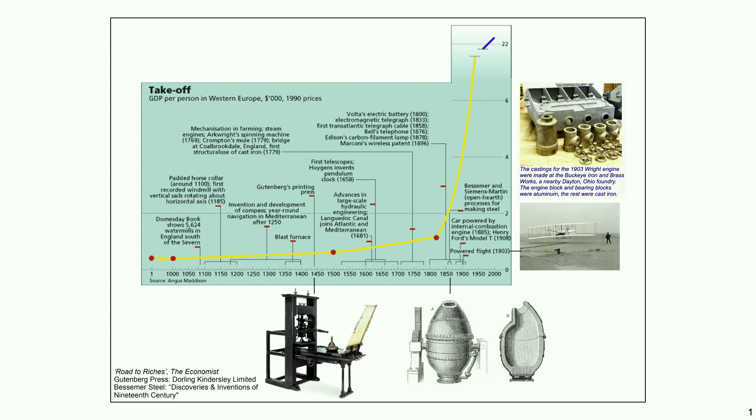This chart emphasizes how advances in manufacturing have changed the course of history. Maybe we're beyond the time where one invention can do that, but Gutenberg's printing press in the 1400s, printing of books using movable type, and the casting process that made that possible, spread information across Europe and around the world. Or the Siemens-Bessemer process for open hearth manufacturing of steel in the late 1800s, in the Industrial Revolution. And even the Wright brothers' airplane, not made in quantity, but the engine block was made of a lightweight aluminum alloy, and manufacturing helped enable the plane to take off.

Manufacturing is also really hard. Lego bricks are among my favorite things, and think for a moment about how you would describe how to manufacture a Lego brick. You may know that it's made by injection molding, a very widely used process where molten plastic is squeezed into a mold. When the plastic has cooled, has frozen, the mold opens up and the brick drops out.

I just described it to you at one level, but now think about how you would explain how to make the surface so smooth, the dimensions so accurate, and the bricks so consistent that they will all fit together no matter what size and shape. And now imagine how one would describe the manufacturing of something as sophisticated as an iPhone.

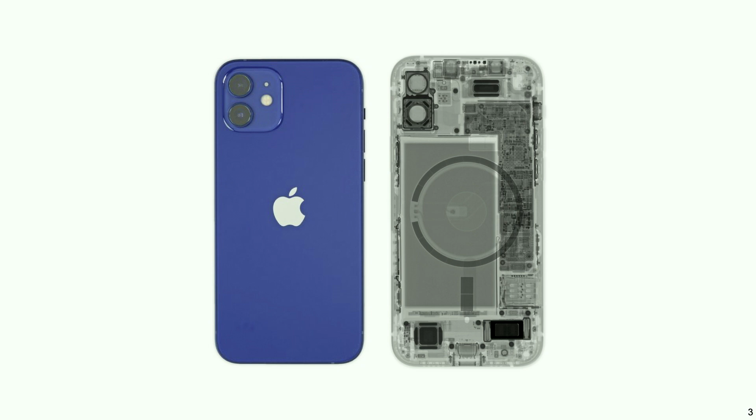My endpoint will be that while I'm very much a hardware guy, a mechanical engineer, I see the intersection of computing and manufacturing helping solve this challenge and create immense opportunity.

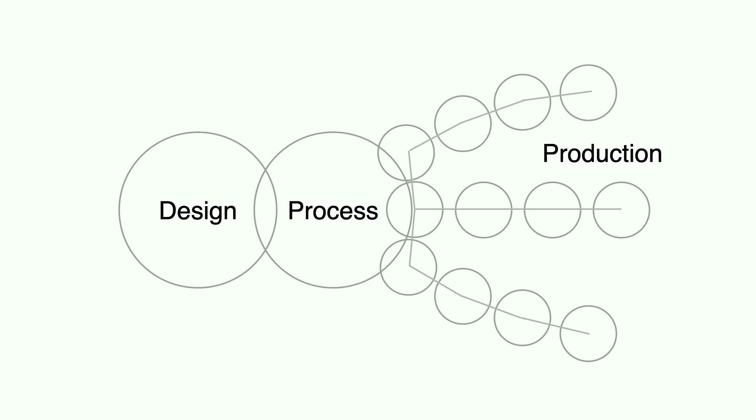And we're also faced with fragmentation of manufacturing. We're at a place in the world where there's a lot of discussion about manufacturing's importance and how manufacturing has evolved over recent years and decades. And we also struggle with transfer of that information. Apple, no matter how large, even if it chose to manufacture itself, cannot make all the parts and pieces. It's just not possible. So we've gone from, in a way, vertical integration of manufacturing to fragmentation of manufacturing.

And I think we can bring that back together no matter where it happens. So a central question to me in my research and other activities is how can we collapse this complexity? When I came to MIT in 2013 as faculty, I began thinking somewhat serendipitously about 3D printing.

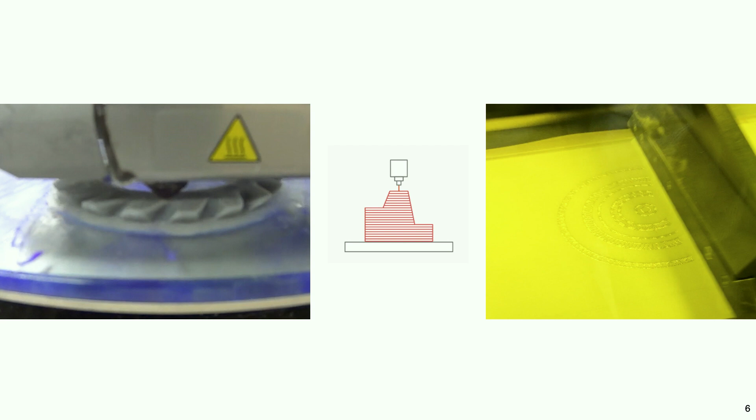MIT's first work in 3D printing was done in the late 1980s. Our colleagues at MIT actually coined the term 3D printing around that time. Now, 3D printing is not a way to make even a large fraction of all the parts and products that we use. Look around the room, you don't really see any 3D printed parts, but I'll tell you how I feel it is transformative as a principle in some important contexts.

And you may know that 3D printers stretch from those you could use on your desktop or in your garage to heavy-duty industrial metal printers. I'll tell you about my perspective through the story of starting a company with a student who I met in my first semester at MIT, a student in this program, which is a master's program in manufacturing and design in the MechE department at MIT.

After I taught a class on manufacturing processes to the students in this program, I stayed in touch with the cohort, and with a few of those students, we brainstormed about addressing the barriers that prevented 3D printing, particularly of metals, very high performance materials, from being brought to industrial scale.

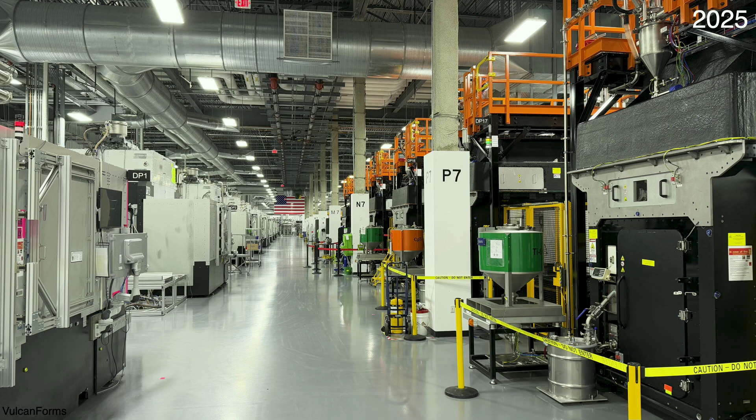A few years later, we formed a company called VulcanForms. Now, 8 years ago was that founding date, and today we have a factory of about 150,000 square feet, an hour west of Boston, that's full of industrial scale metal 3D printers and corresponding equipment, and printers that the company designed and built itself.

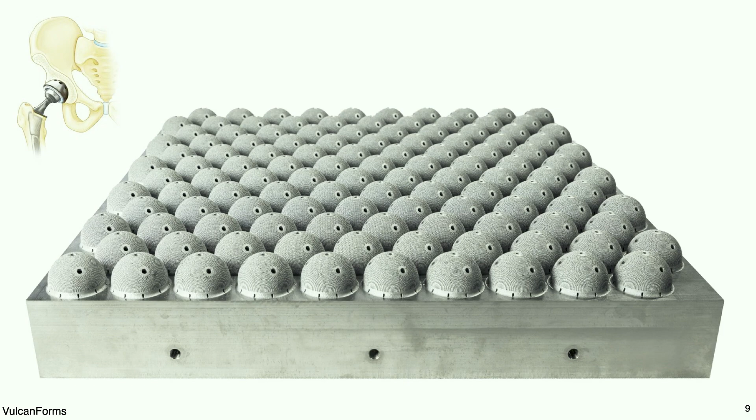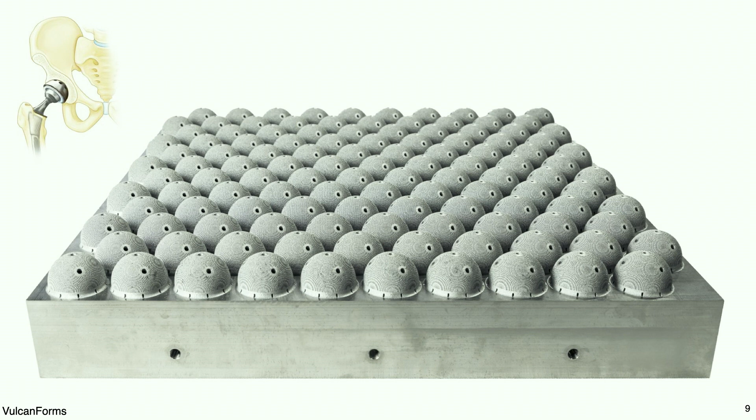With these machines, we can print medical implants, the kind that are in millions of people today. This is the acetabular cup, a component of a hip implant, what you get if you get a hip replacement. It's not just making one at a time, it's making about 140 at a time on one plate. And the same machine, by changing just one line of code, can make a component of a jet engine, or 550 or so housings for watches, potentially smart watches. I have the parts right here in my hands.

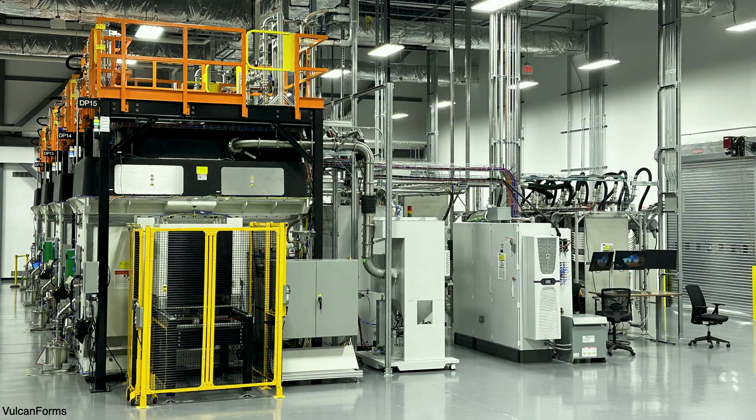Here's a picture of one of the machines, and it's powered by lasers. It's literally electricity plus information, bits, plus a general raw material, metal powder, that makes these parts possible. Behind the machine, you have not just one laser, but a rack of lasers. It looks kind of like a server rack that does compute, but these are actually lasers, and light comes out of each of the fibers plugged into the numbered boxes you see. And if you walk into the factory, it doesn't grind, it hums. It sounds like a computing facility.

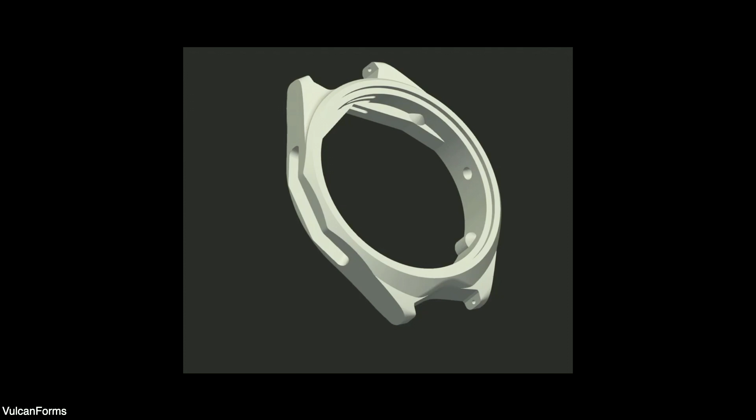Looking back at how the company was built, the software and the so-called digital stack, or digital thread, was also key. Before a part is ever printed, such as the watch housing in my hand, we're able to simulate the process. That's because when you do 3D printing like this, you generate a lot of heat. The lasers melt the metal, the heat builds up, and you have to understand the impact of that on the material properties and the deformation, the distortion of the part, so it doesn't crack, it doesn't break, and you don't have too many defects that can compromise the properties.

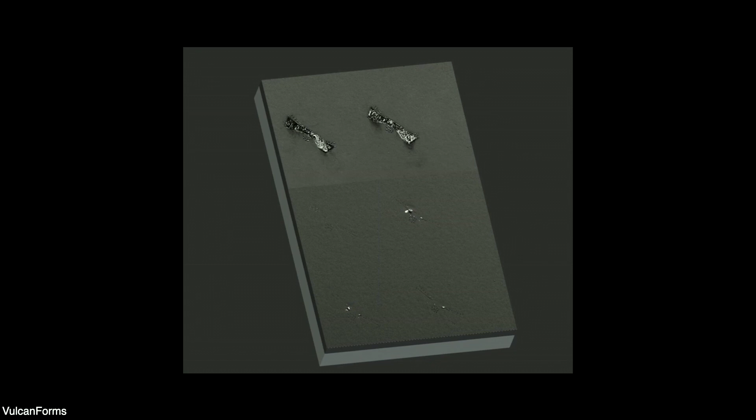So we built and adopted software tools to simulate the process, to virtually lay out the print, and then when the printing starts, we do a relatively straightforward thing that's really important. The printer takes pictures every time it completes a layer, and then on the fly looks for microscopic flaws. The process runs uninterrupted if flaws aren't detected. If flaws are detected, it can identify ways to correct for those flaws. And at the end of the print, there's a digital twin of the printed geometry that can be compared to the expected outcome, and can also be used to train the system over time.

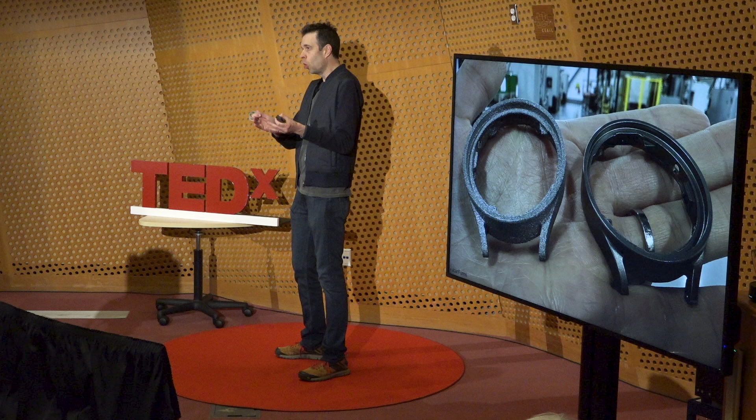3D printing is rarely the only thing you need to do to make a part or a product, right? Few products have one part, and even something like this, to make it look like something a consumer would buy, you need to finish the surface. So we integrate machining with 3D printing in a separate step, but with integrated software tools. We design the part to be printed with just a little bit of extra material, and then in a short time in a CNC machine, a milling machine, the excess is taken away.

The last part is the control of the machines is now centralized. You need humans to unload the machines, maintain them, and do a lot of the downstream steps, but the printing process itself brings the information in real time from all of those huge printers to one control desk. One or two people can sit there and watch the operations and be alerted when there's something that requires their attention. And that has enabled better quality, higher productivity.

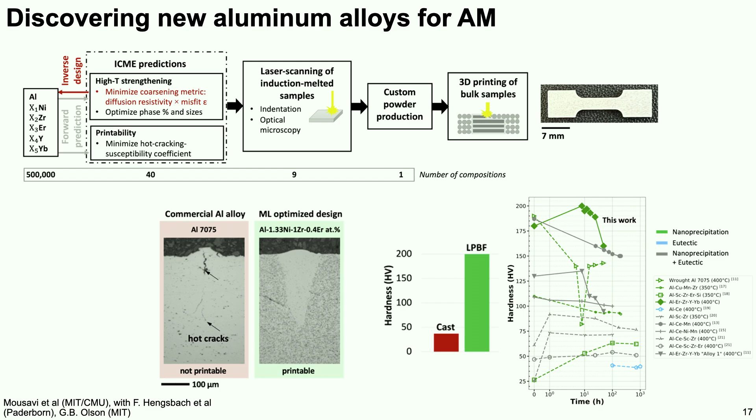In my lab at MIT, we're active in this area as well, and one very active area is identifying new materials for use in 3D printing and other manufacturing processes. 3D printing of this and other types has unique characteristics, such as when a laser melts the metal, it heats it and cools it very, very quickly. That traps certain conditions, microstructure.

In the case of aluminum alloys, we've developed a numerical technique to search a lot of possible combinations of elements and come up with a family of alloys that have better properties mechanically, higher strength and higher temperature resistance than well-established materials. As 3D printing as a manufacturing technology for high-value parts grows, it'll be a way to onboard new materials with unique properties faster, such that we no longer say, I want this specific material, but we say, I want this specific property or combination of properties, and a material can be tailored and custom formulated for that application, in a way as we think about perhaps personalized or tailored medicines in the future.

A few years ago, I read a paper that became very influential to me, written by Rebecca Henderson, who's a professor at Harvard. She was a PhD student at MIT when she wrote this paper, and it introduced the term architectural innovation. The paper says that the essence of architectural innovation is the reconfiguration of an established system to link together existing components in a new way.

While there are many new technologies, I feel like in some way we're faced with new technologies and possibilities in increasingly astounding ways. In my opinion, a lot of innovation is that of the architectural type. We take established capabilities and we put them together in new ways to create new possibilities. That's in a way what SpaceX did, what Amazon did, what TSMC did, brought new capabilities by thinking at the system level.

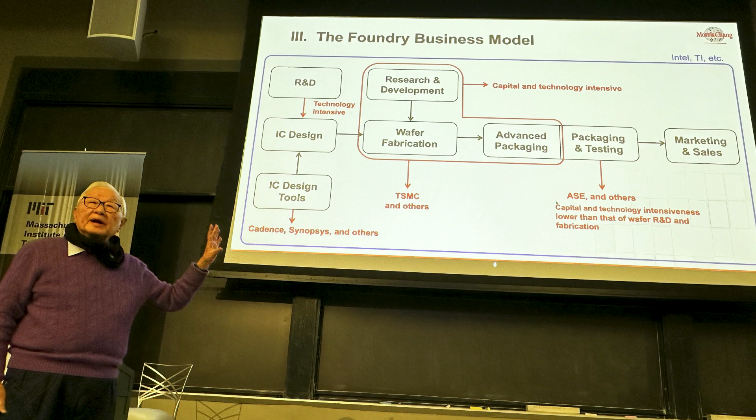Speaking of TSMC, we hosted Morris Chang, the founder of TSMC, here for a talk about a year ago, and he reflected on his career as the founder of TSMC, the most important semiconductor company in the world, and described how TSMC reconfigured the boxes of the semiconductor industry, established shared manufacturing capacity, and then cultivated an ecosystem around it. I feel that's what will happen as computing and AI converge with manufacturing going forward.

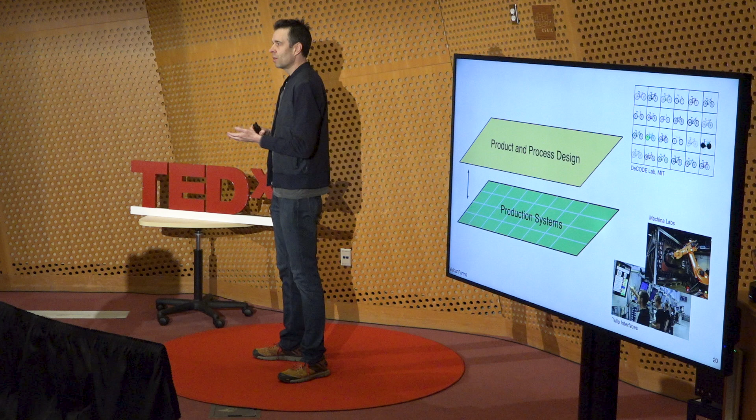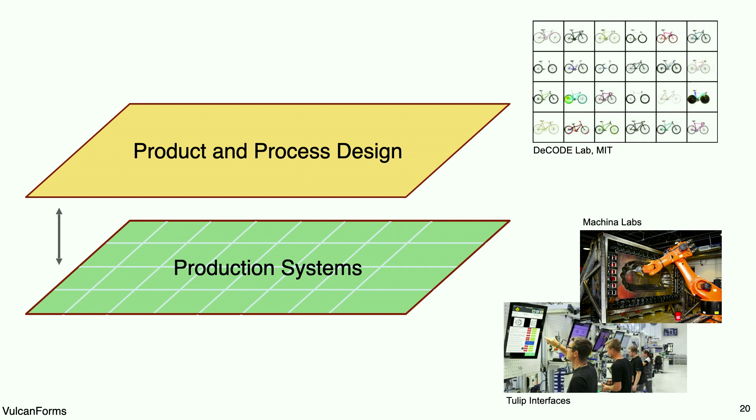So I have this very simple view that I'll leave you with, that we'll see advancement in digital-ready and digitally enabled production tools, and advancements in tools that allow humans to interface with design and manufacturing. As there's more and more progress in multimodal AI models, models that can handle not only text but images and video and incorporate physical simulations, we'll be able to stitch all of these together and rethink how manufacturing is done, where it's done, and what products are possible in important ways.

So back to that idea of, how do you describe the manufacturing of a Lego brick or something much more complex in the future? I think it will be very possible, and there'll be three broad implications. The first is we'll see completely new product designs.

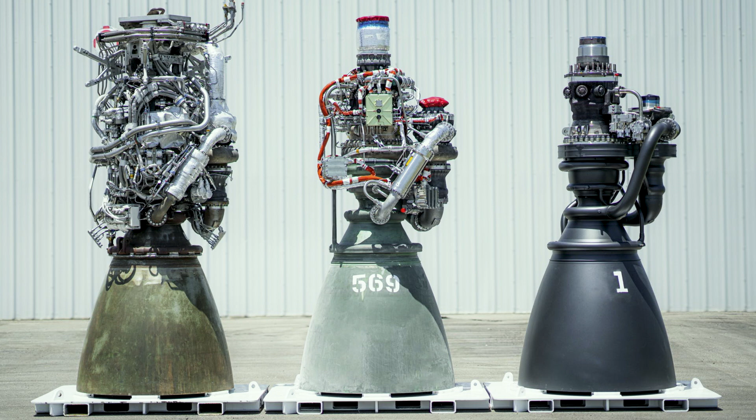This is, of course, the SpaceX Raptor engine, and SpaceX has adopted 3D printing quite intensely to drive rapid iteration and rapid development and a convergence of design and manufacturing. Going from Raptor 1, 2, to 3 is an incredible transformation and also a simplification. So the complexity has in large part been collapsed and the manufacturing has been condensed.

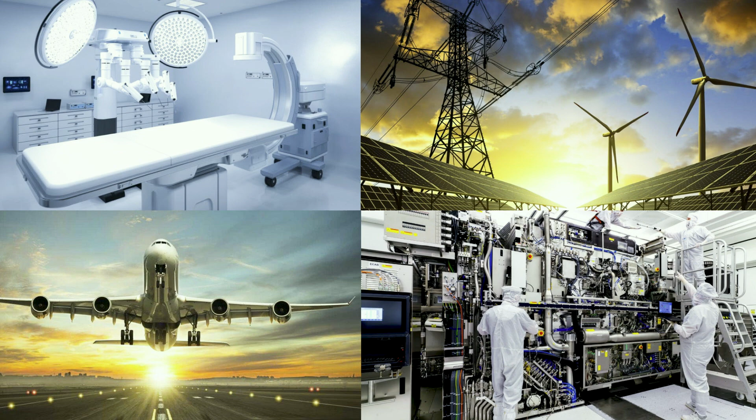But instead of manufacturing being dedicated, manufacturing will become more flexible. If I may use the example of the industrial 3D printer, switching its code to make medical implants, jet engine parts, or smartwatch housings, we'll have facilities and factories, whatever size they are, that are flexible and can change what they make more responsively and at a limit on demand.

And last, it changes the value chain. A lot of how companies make decisions and perhaps how policies are set are based on a perception and a reality of how value is distributed: owning the design versus owning the manufacturing and the relative economics and value add along the stream. Incorporating more digital technologies, more automation in one way can boost the value of production as an information-driven asset, and I feel that has very important implications that we're just scratching the surface of.